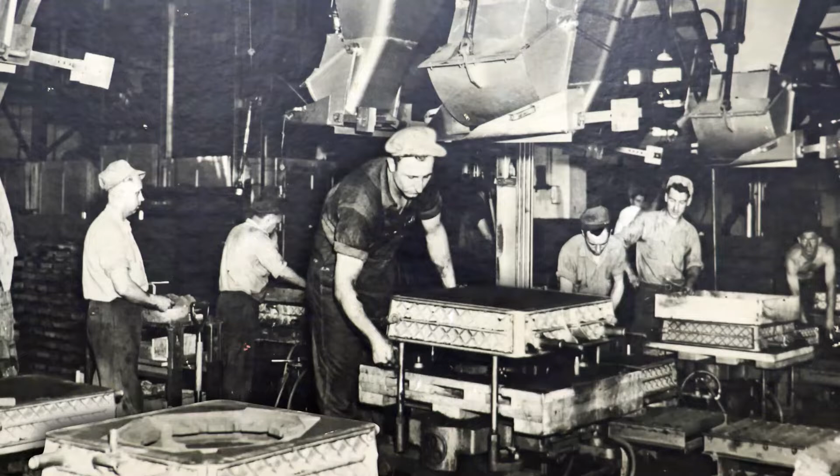This is the oldest cover that we've been able to find. It was located between Riverside Park and Mahler Museum. We believe it to be over 100 years old, as we cannot find it in any of our archives or catalogs. It was made by the Aylward & Son Foundry, which was on the corner of North Lake Street and Main Street.

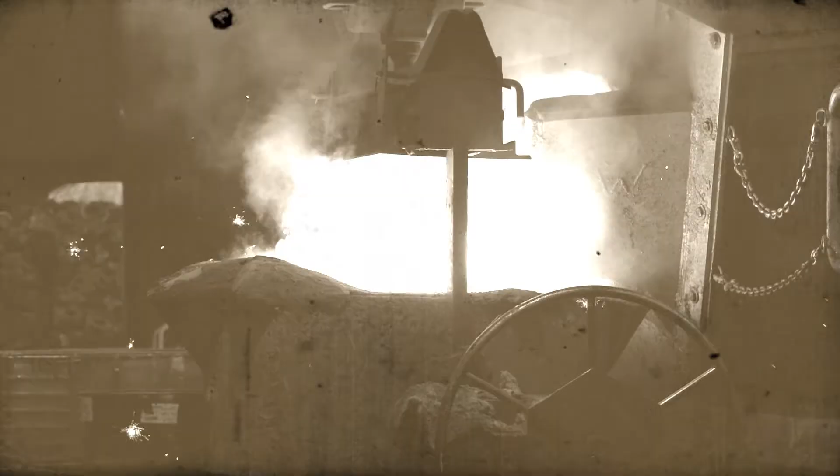And there was an 18-year period where we sold castings branded under both the Aylward family name and the Neenah Foundry name. The second generation Aylward didn't have a succession plan, and when he passed away, there was nobody to take over the business. That was in 1941, and that was the end of the line for the Aylward name.

Now, in the meantime, Neenah Foundry had been operating on Winneconne Avenue since 1918. The name changed in 1923, and then after the second generation Aylward passed away, the two foundries were merged, and it all became operating out of the Winneconne Avenue location. So we know that anything that says Aylward, we know it's pre-1941. Anything that says Neenah Foundry, we know it's after 1923.

This is the second oldest cover that we believe to have. It was also cast by Aylward & Sons. It is a very early C-cope design, which was a square, but later we changed to a diamond around 1934. We don't know why they chose to do squares instead of diamonds. Purely cosmetic, probably. The cope is the top half of the mold, which is also considered the street side.

The drag is the bottom half of the mold, which is the underside of the lid. And the Type C cope originally was called a checkered cope, probably because it looks like a checkerboard. But as Brian had mentioned, it over time has evolved into diamonds rather than squares, and so now more often it's referred to as the crosshatch cope instead of the checkered cope.

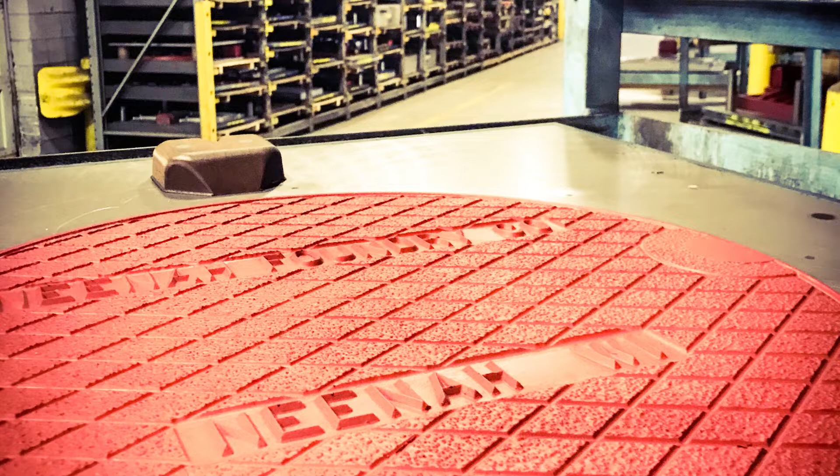This cover was very common in the early days of Neenah Foundry. It is a D-style cover, also called the Chicago Standard. Most of the transportation in Chicago around the turn of the century was by horse. The D-cope design was raised to aid in traction for the horse's hooves, but in later years it was recessed to comply with ADA and make less of a tripping hazard.

But these covers are easy to find throughout the state of Wisconsin still to this day. Driving around town, we actually were seeing these in the street, and we had permission from both the cities of Neenah and Menasha that we could collect them as long as we replaced that with an equivalent.

So we went out several summers ago, and we actually went collecting. And once people learned that we were beginning to look for these, I would get emails with pictures showing me where people were finding them so that we had directions where to go to find these different copes. And we've collected about a dozen of them that are all old antiques.

This is the Neenah Foundry B-cope. It's basically the Wisconsin standard. This is also the most popular lid found throughout the world. The B-cope has remained unchanged since 1934. Some foundries give different copes nicknames, and this one is also called the waffle cope.

All designs on the top of lids are there to keep people from slipping. So one thing that's interesting is the recessed pockets provide enough traction that it's not slippery as it is.

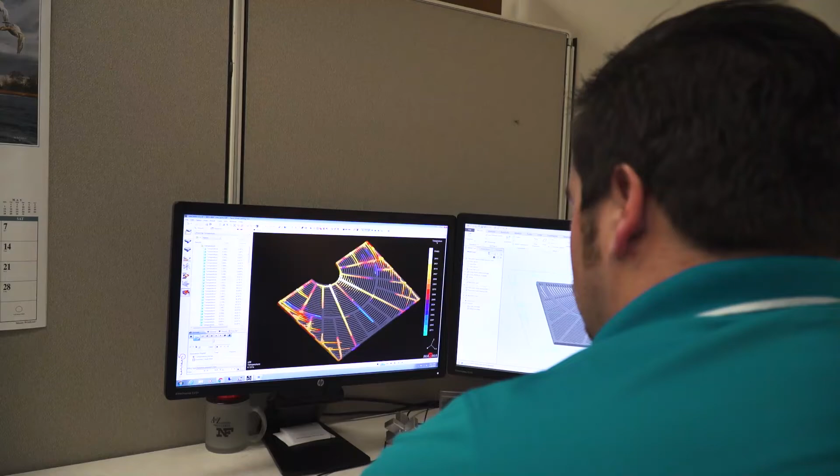Prior to World War II, this was all done by hand on the floor. There was no machinery. They put the pattern on the floor, they put the flask on the pattern, with paper drawings and sketches and hand tools. And nowadays, yes, it's all done in CAD. Much of this is done with automated machinery, so we're cutting these things on milling machines rather than hand fabricating it. It's an interesting transition.

The next lid is a logo lid, which was developed in 2014 for the city of Neenah and has become the Neenah Standard. It can be found more regularly throughout the rest of the city. We make about 200 different logo lids, as they are becoming very popular in most municipalities.

You'll notice there is Perma Grip, which aids in traction. The Perma Grip, of course, is what you see that looks like the leaves on the tree. That's actually Perma Grip texture. And so you can see the highlights of the texture, and that actually gives it a non-slip surface. But we often use it on custom logo lids because it gives the natural look of vegetation, trees and branches and leaves.

Well, that's actually the logo for the city of Neenah that appears on all of the communications on the website, on their stationery, on their letterhead. The history of the council tree actually predates the city of Neenah. It goes back to the early 1800s.

What we wanted to display is all of the older covers have the natural patina that was developed over time. The Neenah council tree, that actually we wanted to look like a new cover, so we actually blasted and clear coated it to make it look like it was new as opposed to an older antique. But all of the older covers, this is the natural finish as we found them in the streets.